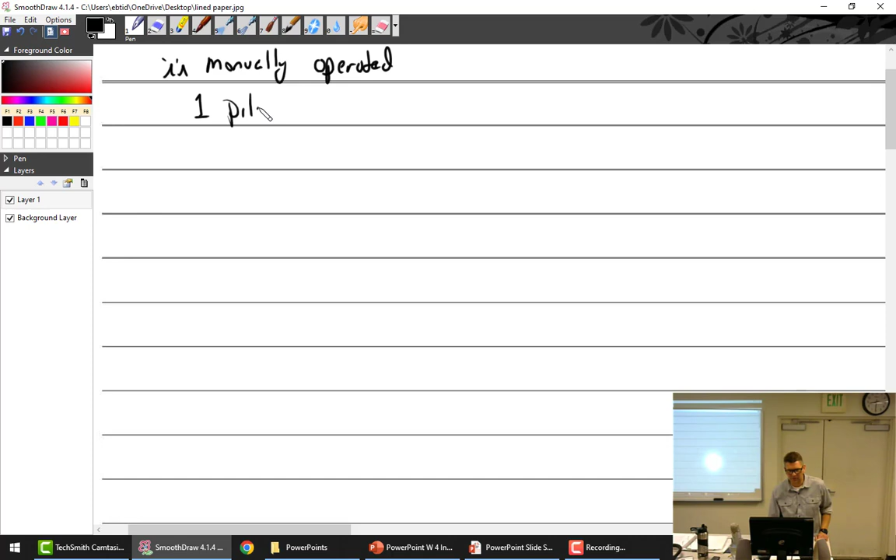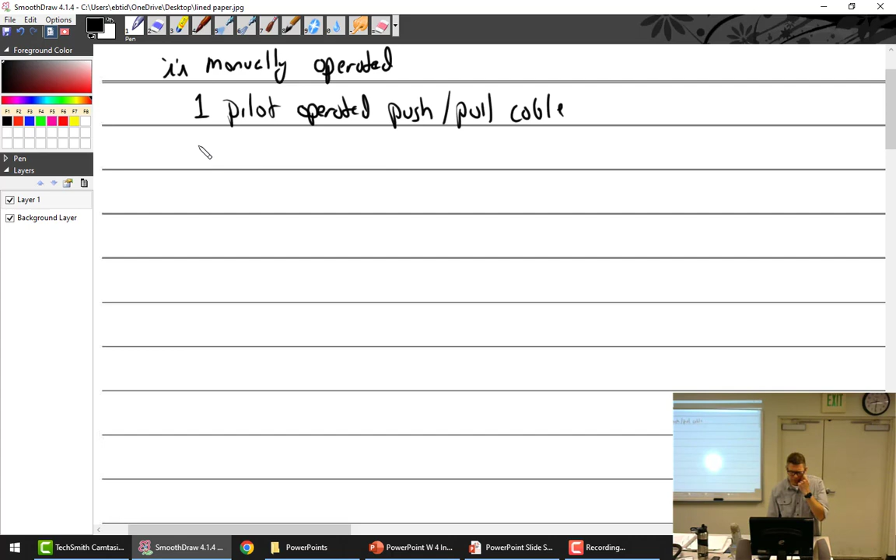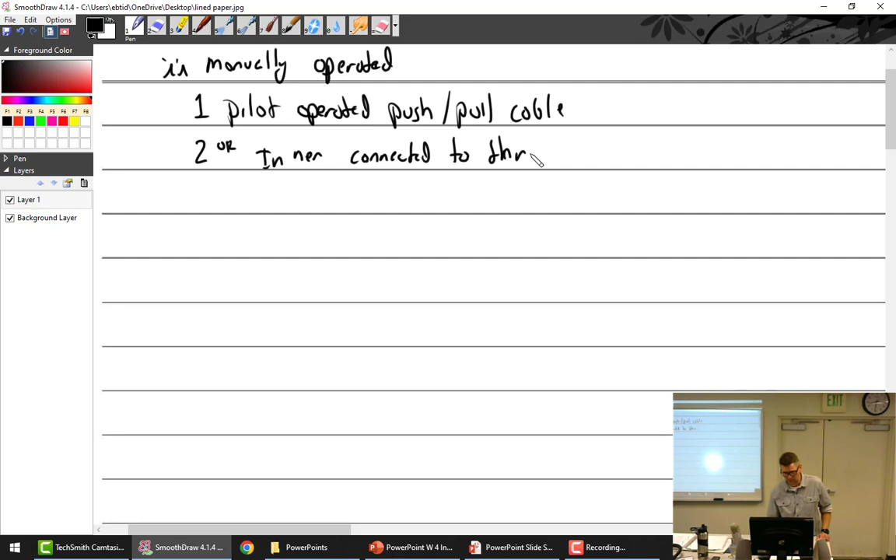All right, if we have a manually operated one, that would be operated with the pilot-operated push-pull cable. Or, I should say, interconnected to the throttle. So when you move the throttle, you move the wastegate at the same time, one lever.

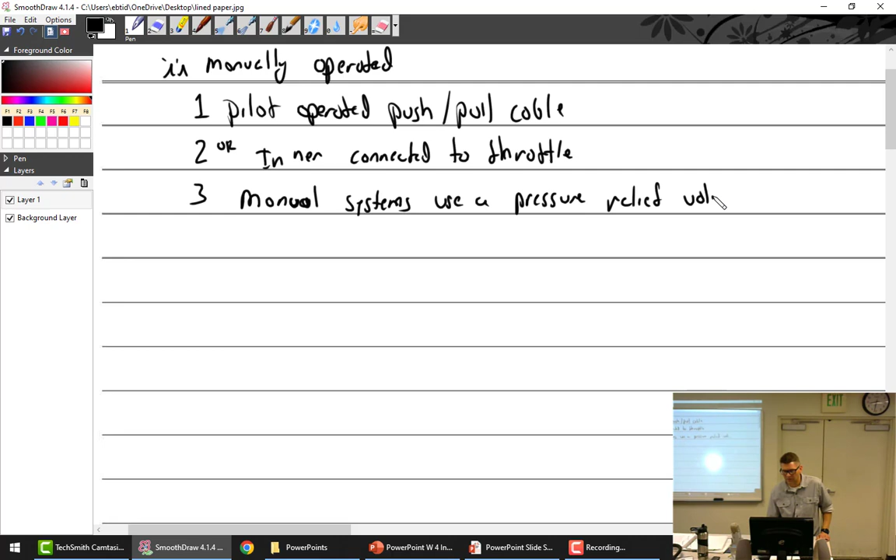So, yeah, I'll show you a picture. Manual systems use a pressure relief valve in the upper deck.

You have a turbo on your car? Who has got the turbo? Your Prius doesn't have one? Not anymore, not anymore, you're talking about 2005? No, it doesn't. Freeway grade, towards the center. Oh yeah, never again. Really, I would have thought the electric motor would have really... It's not that strong. I had that thing floored and I'm just crawling along, and everybody else behind me is pissed off, trying to get past this big old Prius driver. I had to give her a few breaks going up that thing.

Okay, the reason why I'm asking this... Oh, if you offer. Where do you live again? Somebody said you live in Tracy. If you offer, oh, so you are by me. Yeah, I'm south of you. He's like, hey, you want some? So you're way down the freeway by the time I leave here.

Anyway, the reason why I was asking that, you have pop-off valves on your cars? Blow-off valves, yeah, blow off. Do you hear them at all? Some of the nicer ones, yeah. It's more aftermarket ones. The soft ones don't give you that. Oh yeah, okay, yeah, all the aftermarket ones are really nice though.

Some of the EcoBoost Mustangs, some of the EcoBoost, I drove a car, it was so loud I thought I blew the thing up. Yeah, it was loud. It was a Ferrari California.

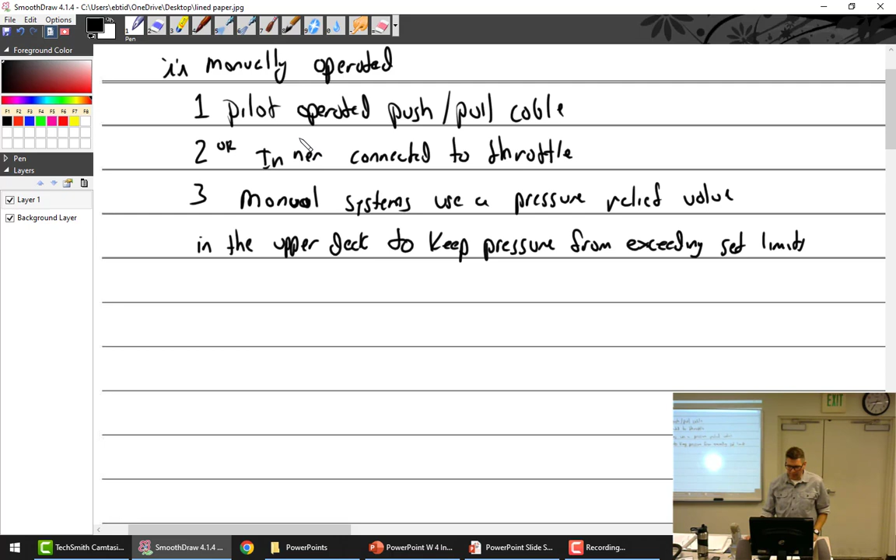Does it not use the wastegate because that would be too slow? Okay, so right now we're talking about the manually operated system. In the manually operating system, you're not going to have independent controllers to override and adjust the wastegate, so you are doing it on your own, so to speak. So either we have this manually controlled system.

So if we look at this, it's a very simplistic system, but we've already talked about it. Compressor comes in, so we've got this upper deck pressure right here with this pressure relief valve, which is normally going to be closed.

And then it's going to come through here, but we have the manual wastegate. I don't know what this is floating around over here for, but let's just imagine that that's controlled by a pilot push-pull control in the cockpit.

So my scenario where I was talking about, the pilot adjusted the upper deck pressure to the max manifold, takes his feet off the brakes, and we start rolling down the runway. Well, let's just say that maybe he didn't do that procedure, and he just kind of set it where he thought he wanted it, and then firewalled it, and we take off, and that thing just goes to overboost.

Well, it will probably overboost for a short period of time, but then this pressure relief is going to pop off and relieve that pressure, kind of like we could call it an idiot pressure relief valve if we wanted to. So it's like an idiot light, or what's the word I'm looking for? But anyway, it keeps you from blowing up the engine because you exceeded it.

But under normal circumstances, you're expected to be running the manual wastegate. But should you screw up, you've got at least one fail-safe right here.

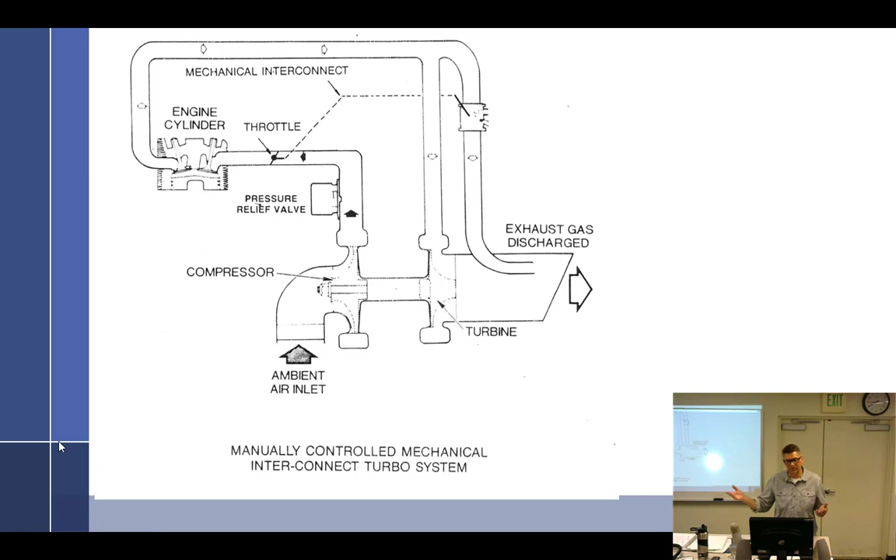Like overspeed? Yep, exactly. What was it? Overspeed? Like overspeed. Oh. So you're going to look at how far you overboosted it, for how long, what you're going to do, and so it can get really, really pricey. I like a hot start. Yeah, all right.

Manually, or oil controlled, or automatic, I could guess.

Oil controlled. One uses a piston operated wastegate.

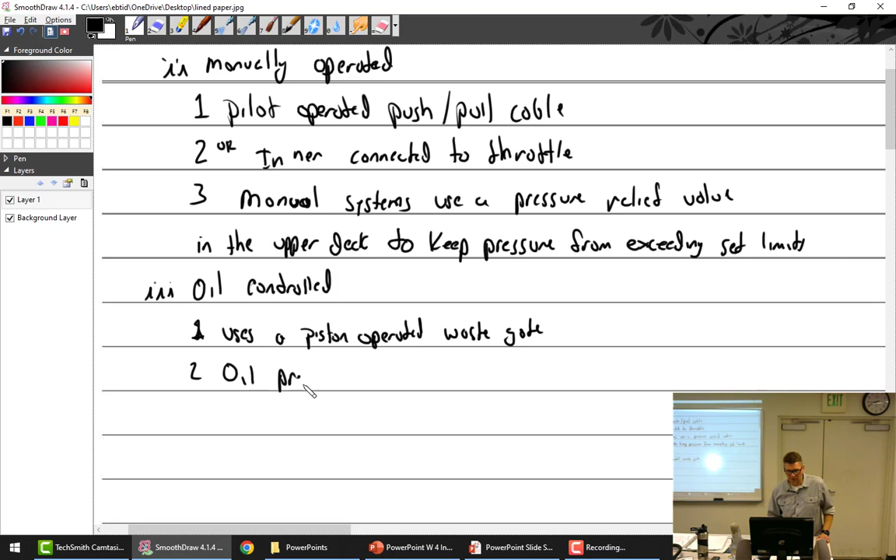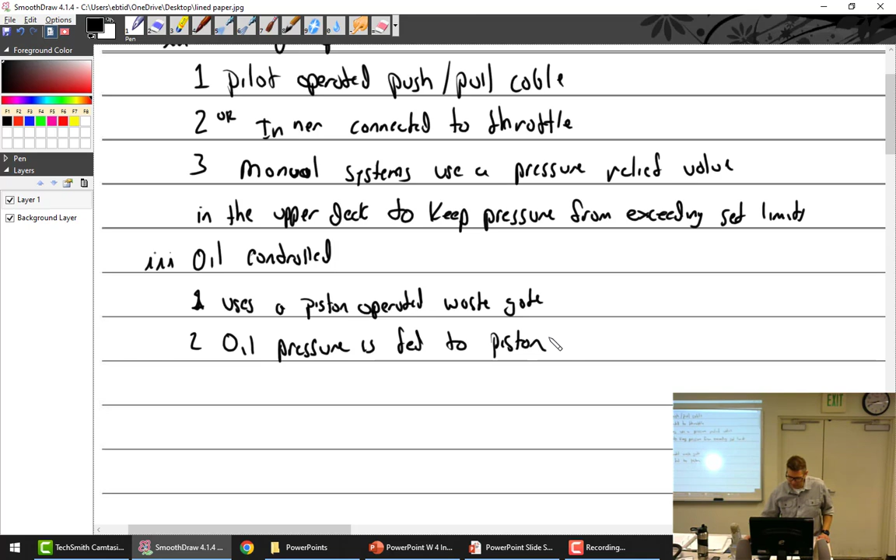Oil pressure is fed to piston at all times. That'll make more sense in a little bit.

So it's not like you turn the oil on, you turn it off. We're going to have a constant supply of oil. We're going to control that constant supply of oil. As pressure builds, wastegate closes. As oil pressure builds, wastegate closes.

And that is turbo on. Like a switch. When it's closed, it's on. So as wastegate closes, the exhaust does not get wasted. It goes up to the turbo, turbo comes on.

Just to keep our minds flowing here, when I'm sitting there on the ground with the engine off, what position would the wastegate have to be? Open. So as I start up the engine, I've got to build up oil pressure to go through, start pushing on the piston. It's going to start closing.

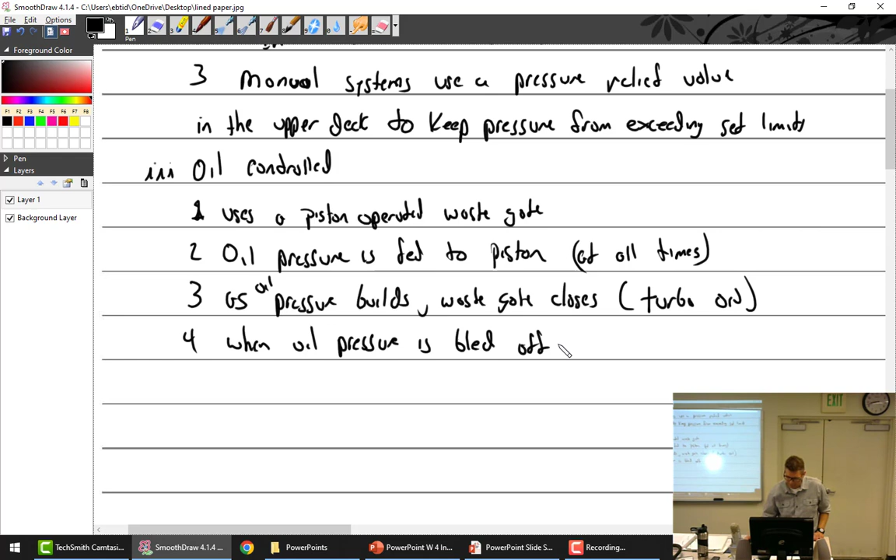So it's going to take a little while. When oil pressure is bled off, wastegate opens. Which is turbo off.

The position of the wastegate is variable. Meaning it's not binary, not open or closed. It's like a throttle. And you're like, what's a throttle?

Wait, did we talk about throttles? It's like a throttle, the thing in the back of your throat. Yeah, it's a thing. Throttle.

That's exactly it. All right, wastegate. Wastegate is never fully closed or fully opened.

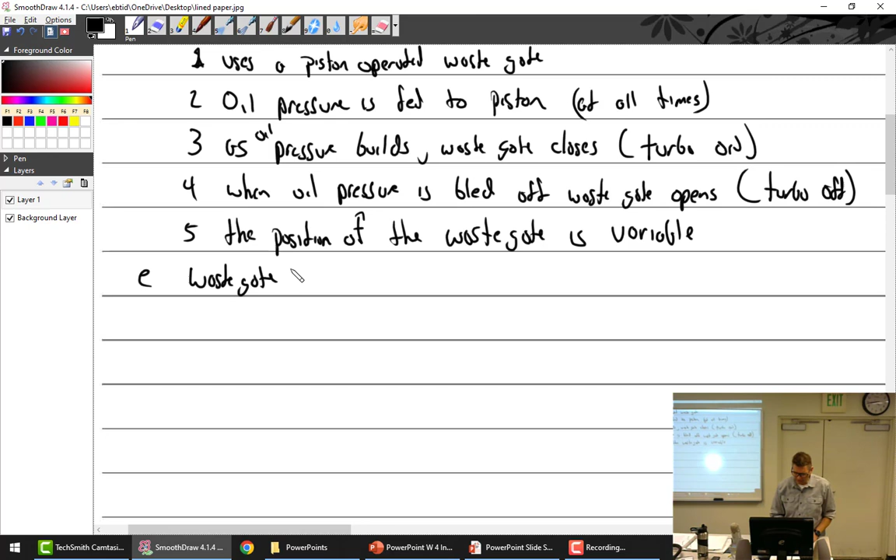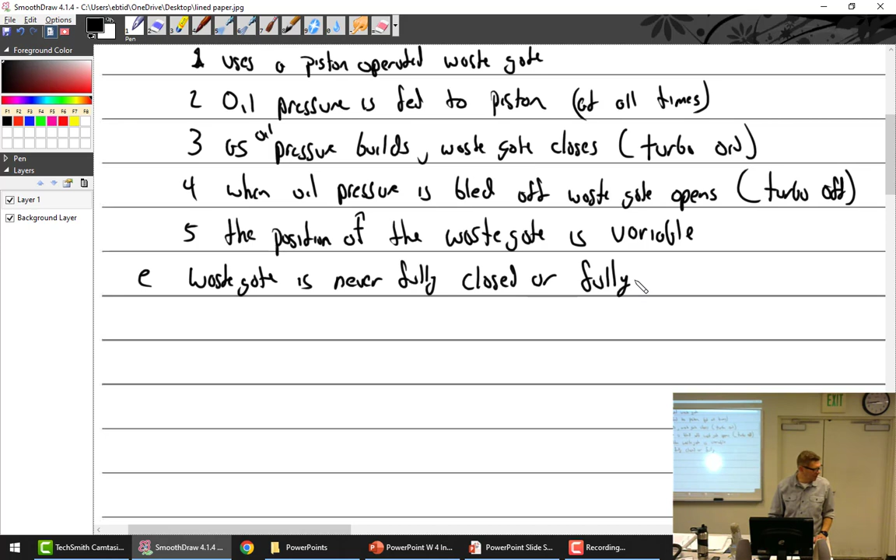Wow, you went through the whole notebook? Yeah. Wow. Never fully closed or fully open.

If it is fully closed, fully closed is turbo on or off. Okay, it could coke. Right? What is coking? Good time.

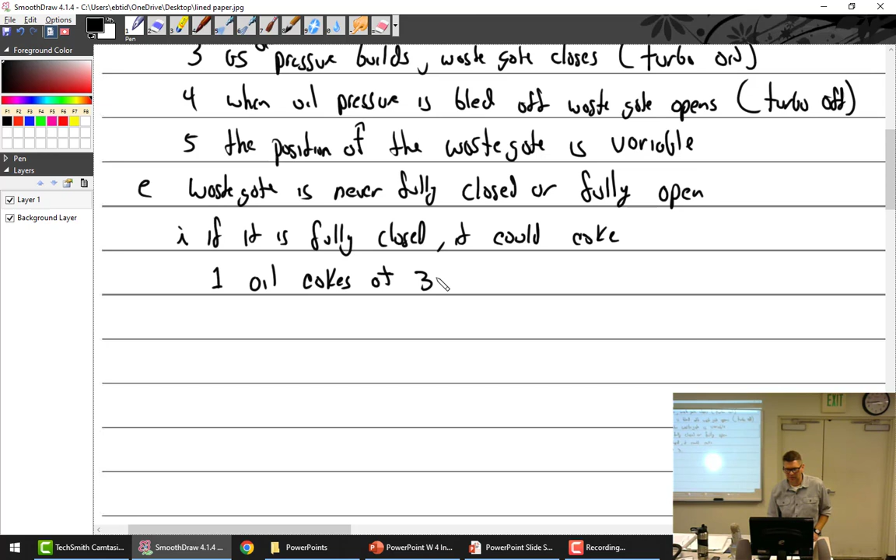Depends on the state you're in. At 300 degrees C or 575 F. Remember what oil coking is? Okay, it's when it turns into that hard crystal stuff.

So yes, we're talking a lot of heat around here. So we don't want that to do that. Would that be buildup or corrosion? Buildup. And then it can start blocking passages.

Let me see. Okay, this is why cool down is important. This is why cool down. Jeez, the coke is at 575 and the exhaust is what?

15, 1600. Can't let it sit there. So the oil can't get that hot, cool down. But if you keep it moving, it's only there for a brief moment of time and it won't get that hot.

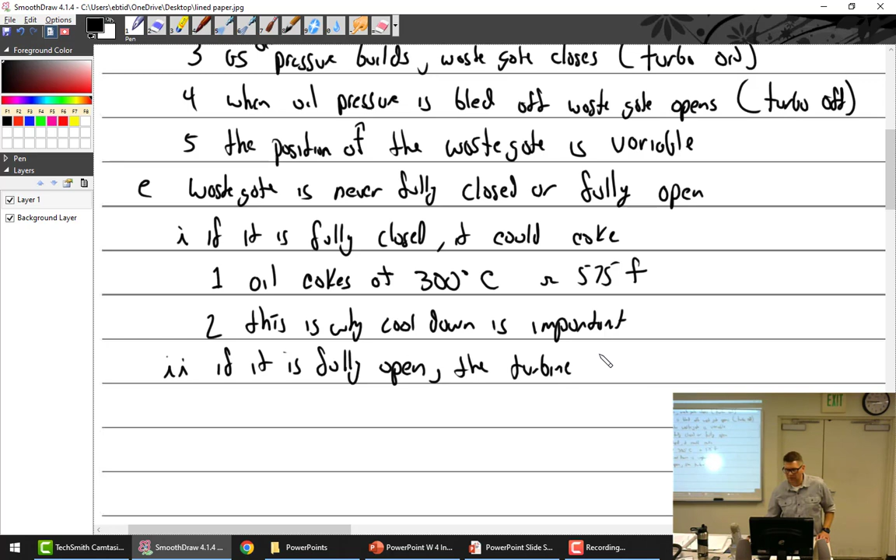If it is fully open, the turbine doesn't turn. I imagine it actually would turn. They say that, but you have incoming ram air that's going to hit against the turbine wheel, which should spin it and keep it going.

But yeah, this is what they say here. So fully open, turbine does not turn and is unevenly heated, causing stresses and cracks.

All right, so there's your three systems. Let's get into detail. Well, I pretty much already did detail on the fixed, so we can just move right across that. You gonna be all right?

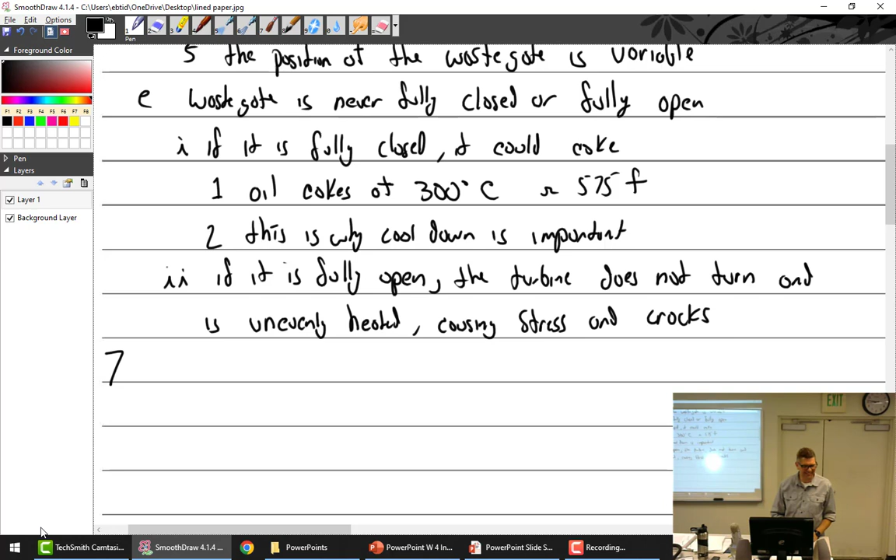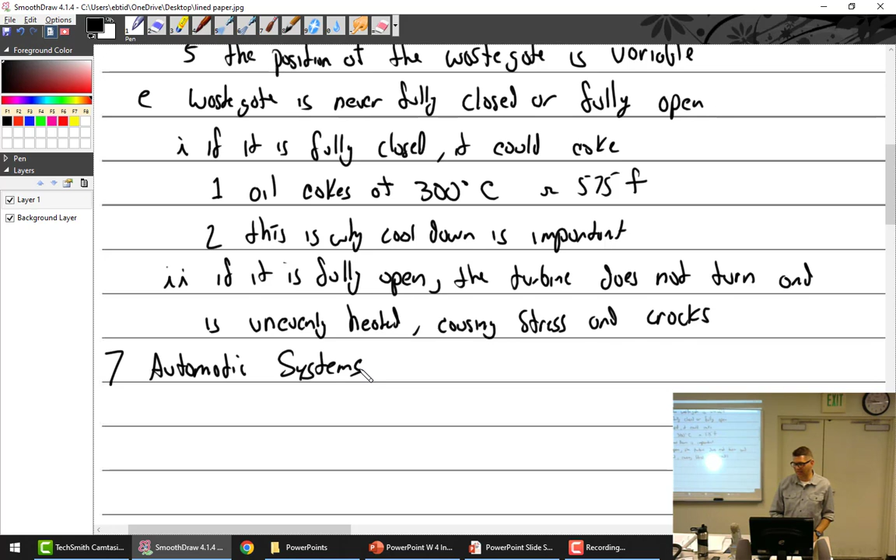Yeah. Big yawn, I'm very tired today. Should I make it more interesting? No. Yes. You're doing just great. Well, I just get stuff and throw it at you, that's all. Yeah, where's the wrench, the bag of Skittles?

Keep forgetting them. All right, automatic systems. Wouldn't it be nice if there was just one automatic system? But nope, there's different. Let's talk about Lycoming systems first.

And there are many. And then we have to talk about Continental. And there are many. So settle in. I don't want to. All right. You have to. So, no, you don't.

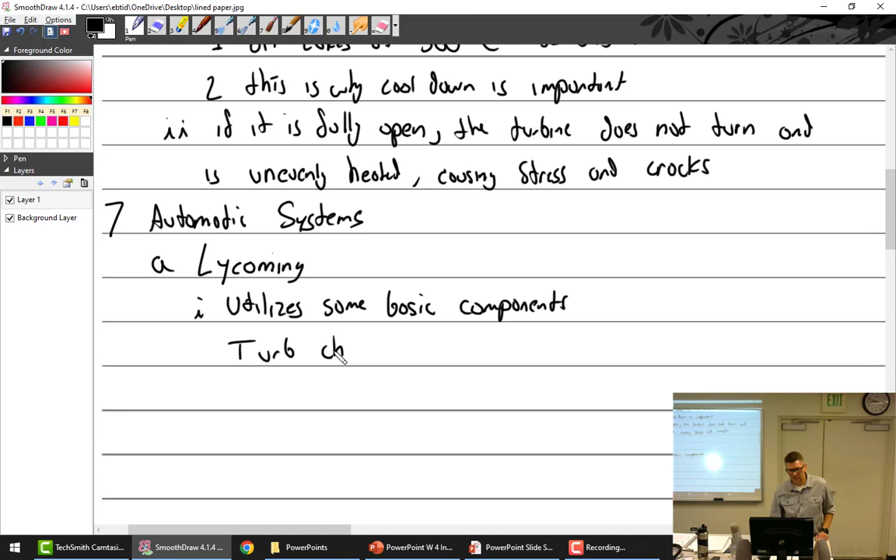All right, obviously we're going to use the same basic components through all of these. So it uses the same basic components. And the basic components would be the turbocharger, the wastegate, and then let's see, turbocharger 1, 2, 3, and then it will use one of three systems.

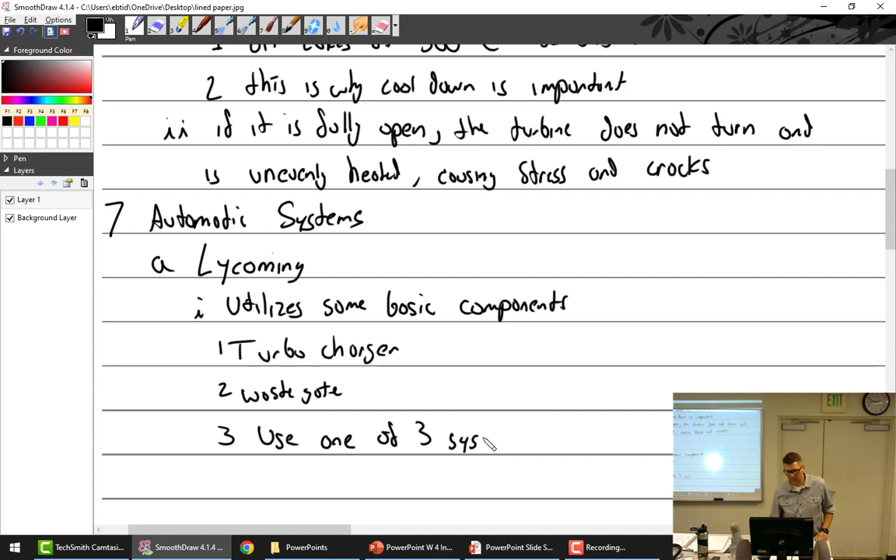Now, full disclosure here, this is going to get slightly confusing, as in wait a minute, is that like system 1, 2, and 3? But now you're talking about this, but that doesn't match 1, 2, and 3. There's no way I've seen all of the engines out there, and even Lycoming themselves with their turbo publications, when you read through it, it doesn't really differentiate well between, oh, this is that system, this is this. And the reason why it gets that way is because you have basic systems, and then you have airframe manufacturers who can customize it.

And go, oh, we like system 1, but we want that controller, right? And they can do that.

You can actually find airplanes that don't match types 1, 2, or 3 exactly - they're kind of a hybrid of different stuff, because that's what the airframe manufacturer asked of Lycoming. So you can run into different configurations.

But the idea is if you can identify at least the basics of how it works and what each controller is, then it gives you the opportunity to start troubleshooting. If it does this, then that should be that controller, or if it does this, that's more likely that controller. Because if you don't understand these systems, what people do, like any system, is just start throwing parts at it.

I remember one time I was working on a turbocharged, was it a Baron? I love those planes - yeah, P Baron, turbocharged, pressurized, sweet airplane. The guy was flying along at some high altitude and heard somewhat of an explosion, and the cabin pressure just fell off. So he had to do his descent and stuff like that. Brings it into the shop - I got this, every single person...

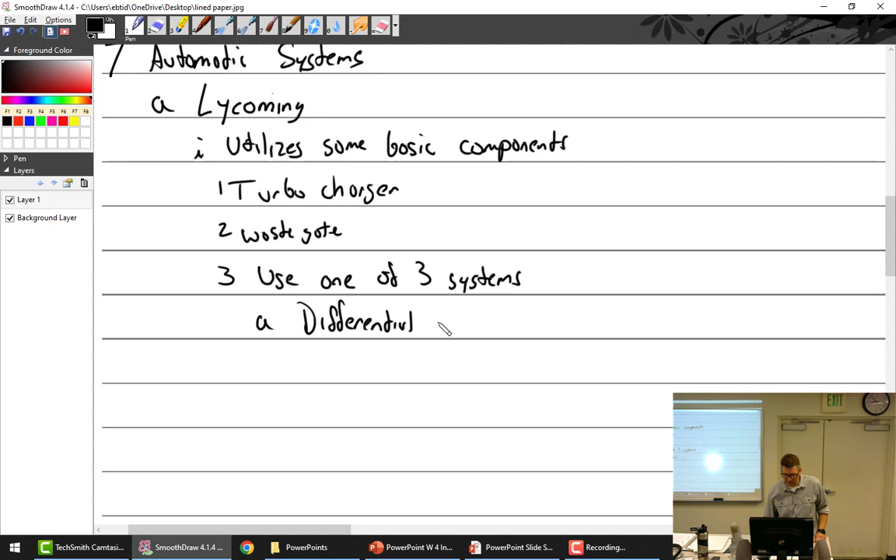All right, three types of controllers: the differential and density. Differential pressure control - we'll talk about what each one of these are. And density control. B, the variable pressure control.

And the slope controller.

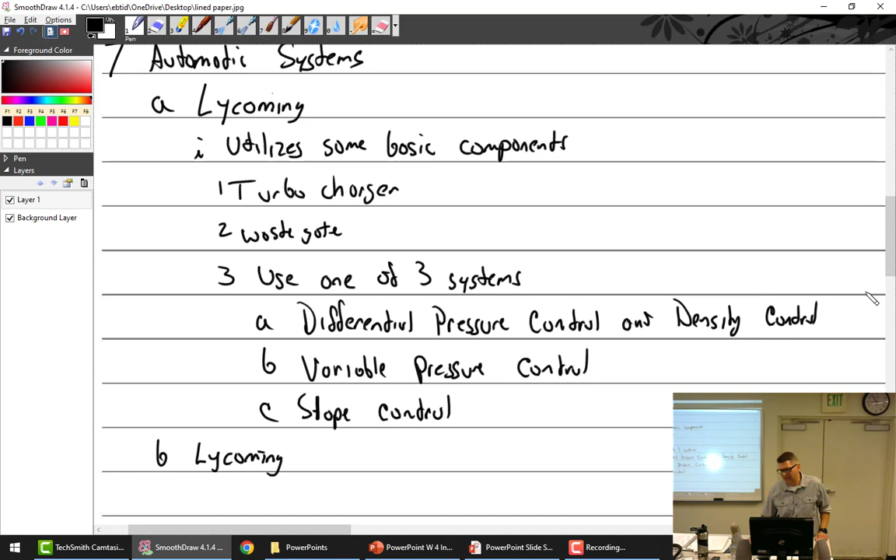We'll start by talking about the Lycoming. Honestly, they're simple little things. They really are. You guys are going to be able to look at it and almost figure out how it works just by the pictures. Lycoming differential density system.

This is used on the TIO 540 Alpha 2 Alpha, used on the Piper Navajo. Used on TIO. What's TIO? Turbo injected opposed. 540 Alpha 2 Alpha on the Piper Navajo.

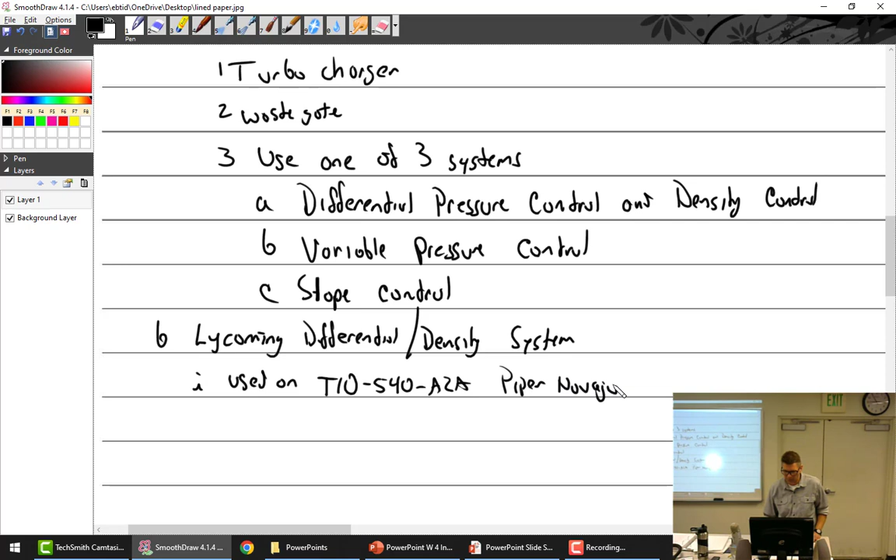Piper Navajo. It is, because this is interesting, sea level boosted by 10 inches. So what am I going up to for manifold pressure? 40.

Is this turbo normalized or turbo boosted? It has a critical altitude of 19,000 feet, if it's working correctly. What does that mean? That's where it drops below, where you see above sea level. It starts dropping off at 19,000.

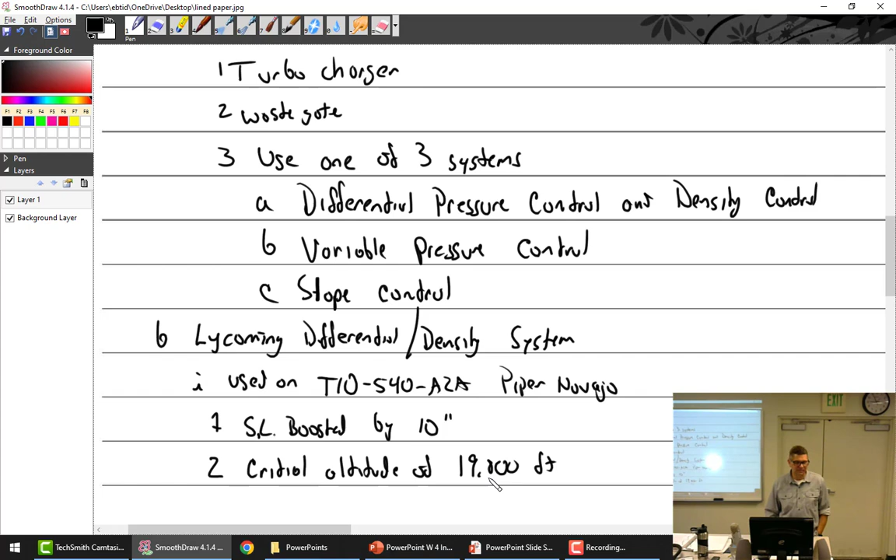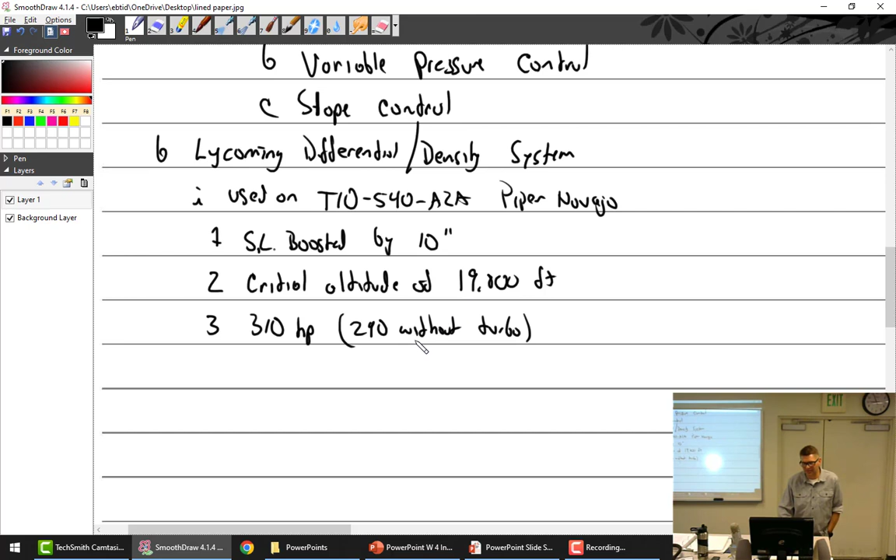310 horsepower. I have 290 without turbo, which doesn't sound like a lot, but you have to remember that's at sea level. So you don't have a whole lot more power at sea level, but you're going to carry that 310 horsepower all the way up to 19,000. Not quite, because you have hot air and stuff, but for the most part, yeah, 300 horsepower.

Is that a 2A or a ZA? Alpha 2 Alpha. They don't do Alpha Z Alpha. That's just ridiculous. Remember, you gotta do the line. That would be it. No, that'd be a Z. Oh yeah, that's right. That would be a... that's all. Wow, my grandma's never done it that way.

All right, done that one. We've done that one. Lycoming density differential control system. I have this big slide, which means that if you're looking at it online, you can't see it all, but you're not missing much. All right, so let's dissect this a little bit here.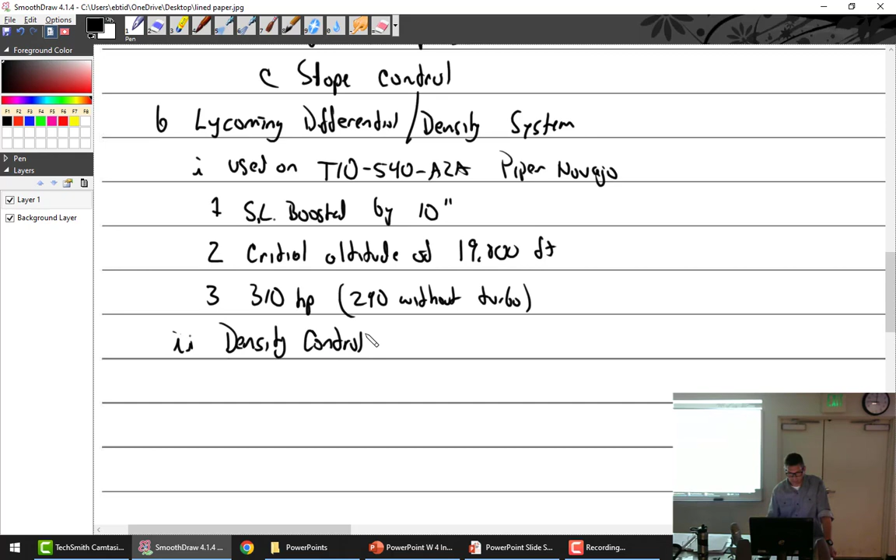This can be one of those things we just build on a little bit. They just change things slightly, but for the most part, that's what you're looking at.

Density controller. It's designed to sense the density of air. Let me go back to the picture, maybe that'll help. Density controller right here, designed to sense density of air after it passes the compressor, before the throttle.

So that's deck or upper deck pressure. I always say upper deck. Some people do say deck.

So its job is to provide the quantity of air necessary for full power operation. As long as you're getting full power operation, it's happy, it's open. It's only designed to meter during full power operation.

So once we get—and the reason I can say that is, if I'm at idle, where do you think this is going to be, open or closed? Closed. Yeah, we need more. As closed as it can get.

Like I said, this is off the Navajo. If I want 40 inches here, and I'm idling at 18 inches or something, it's got to have more. Closed. It's ordering more. I want more turbo.

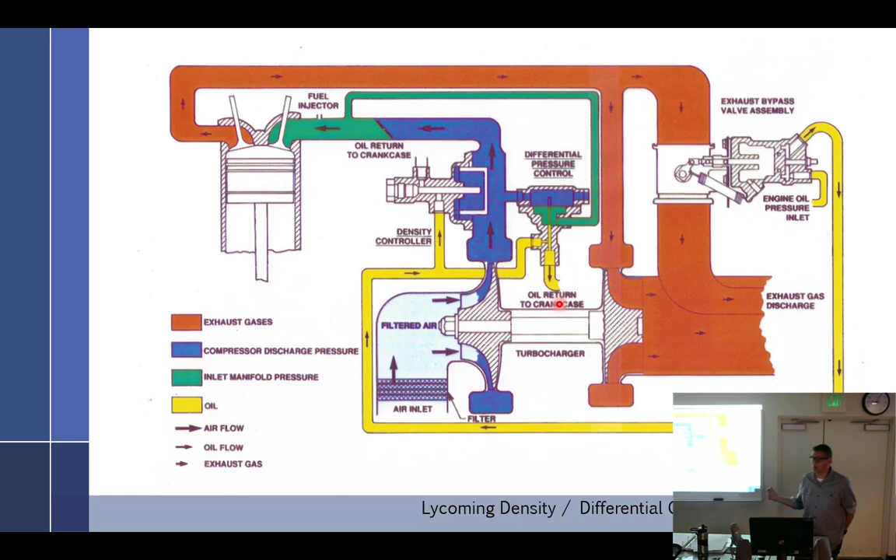Close this off too much, and then everything shuts down, then this starts spooling down a little bit over here, and then you're undershot—so you're going to keep this hunting going for infinity.

Did they have, like you had on, or have on your mixture control, the vernier scales?

This is an automatic system. Oh, it's saying for the throttle? Of course. But a lot of planes have quadrants, and they don't have these. So you're kind of hunting, and they have two of them, so you've got a lot going on there. A vernier wouldn't really help. You go back and forth, back and forth.

That's where the differential pressure controller can really help. Because while this one's over here just saying more power, this one over here is going, now wait a minute, let's be reasonable about this. You're over here with your manifold pressure, only asking for 18 inches. Well, why should I give you 40 inches over here? If you only want 18, how about I just give you 20 on the other side? Is that enough? It's negotiating, right?

Sorry, I just watched a clip that came up when I was doing something earlier. It was My Cousin Vinny. You guys know I love that movie. Yeah, because he's an attorney. The guy was going to kick his ass. He goes, I need my $200. He says, how about I kick your ass? That's a counter offer. That's what we call in my business a counter offer.

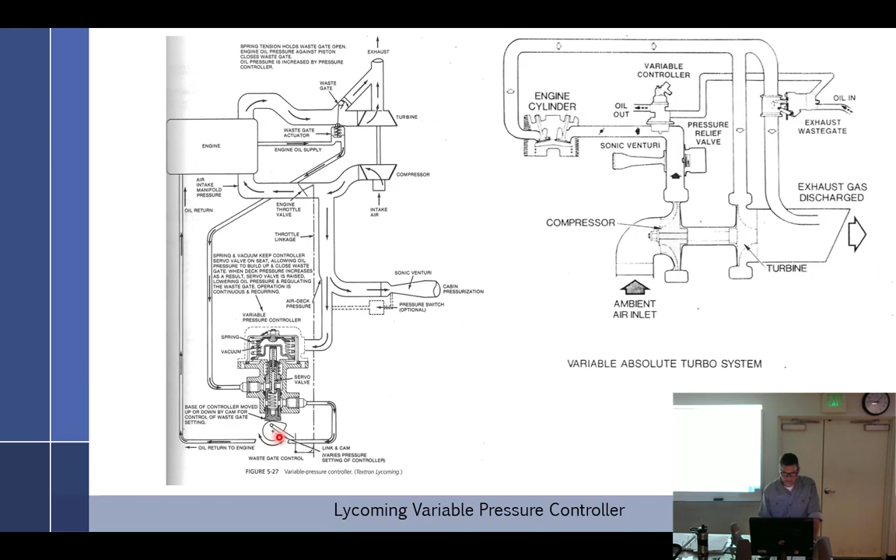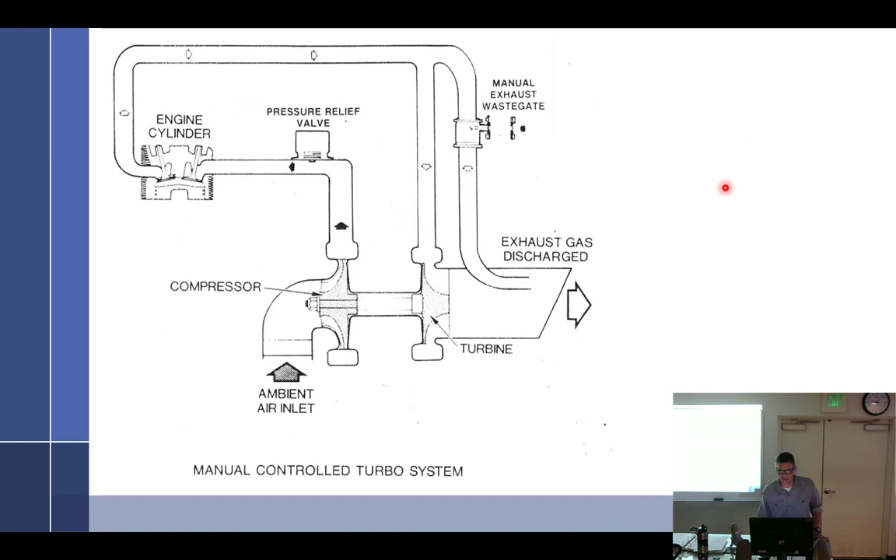Is there a spring in that piston that is keeping it off when the oil pressure is not pushing? In the wastegate, yeah, it's right here. There you go, right there. So one spring going one way, one spring going the other. There's a spring right there. All right, got that?

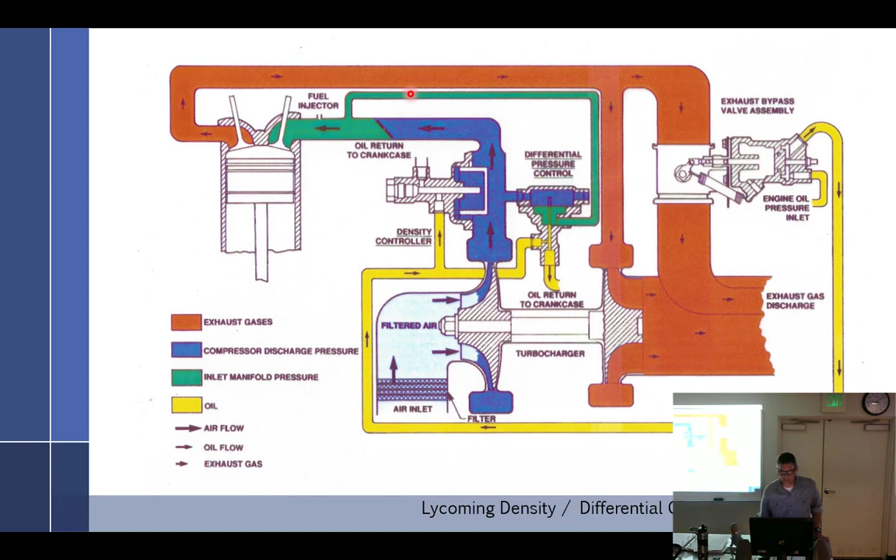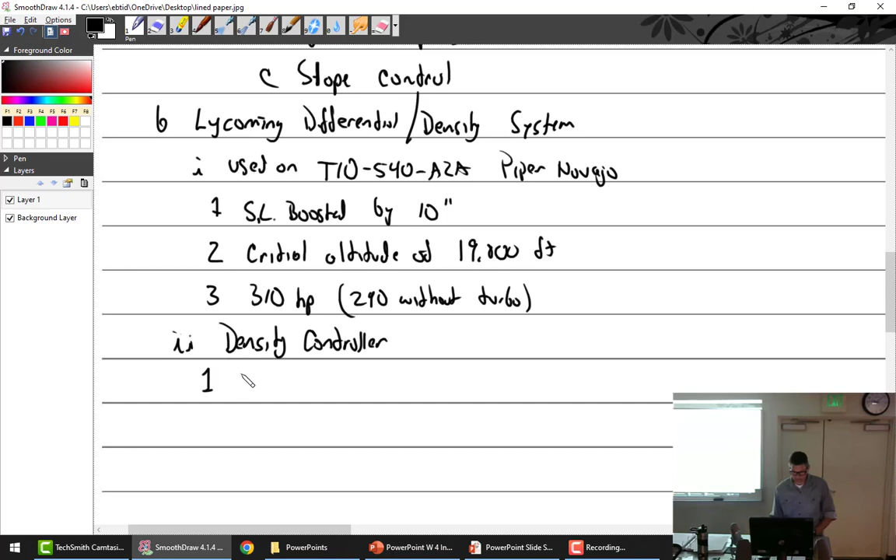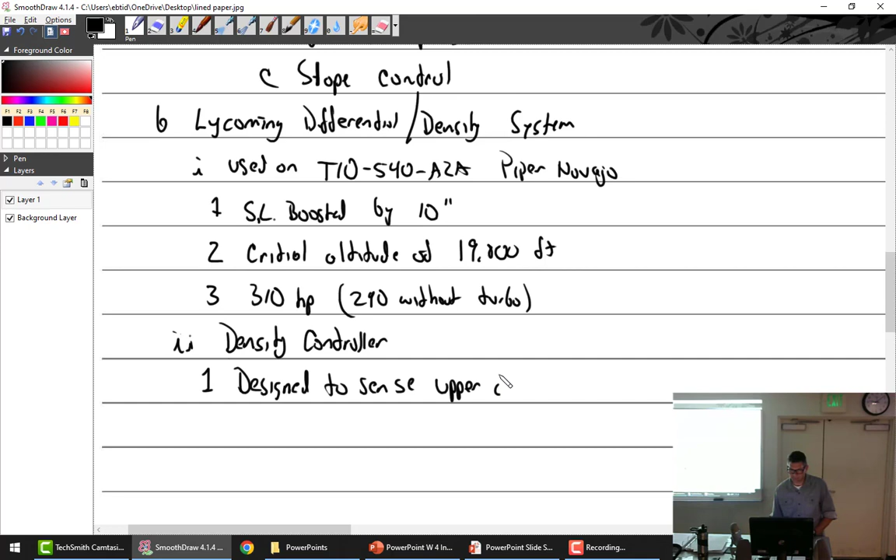Let's write about it. Density controller: designed to sense density of air after it passes the compressor, before the throttle. We could abbreviate that - designed to sense upper deck pressure. Like I said, I forgot until I looked at my notes - I think Lycoming just says deck pressure, because really there's no lower deck. But it could be.

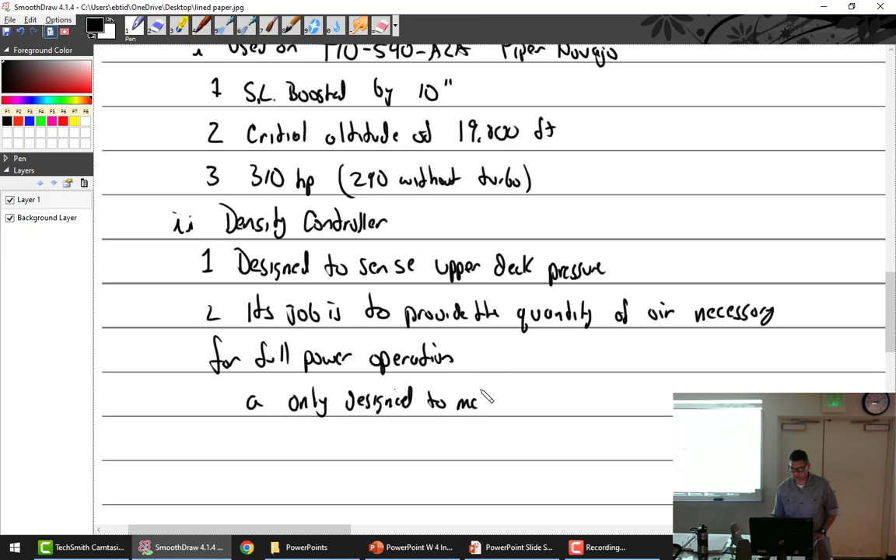Its job is to provide the quantity of air necessary for full power operation. It is only designed to meter during full power operation. Like I said, the reason why I say that is because its job is to give you full power - 40 inches, in this case. So it's only going to meter all the way up at full power. Otherwise, it's just not going to get a chance to do its job, it just stays closed.

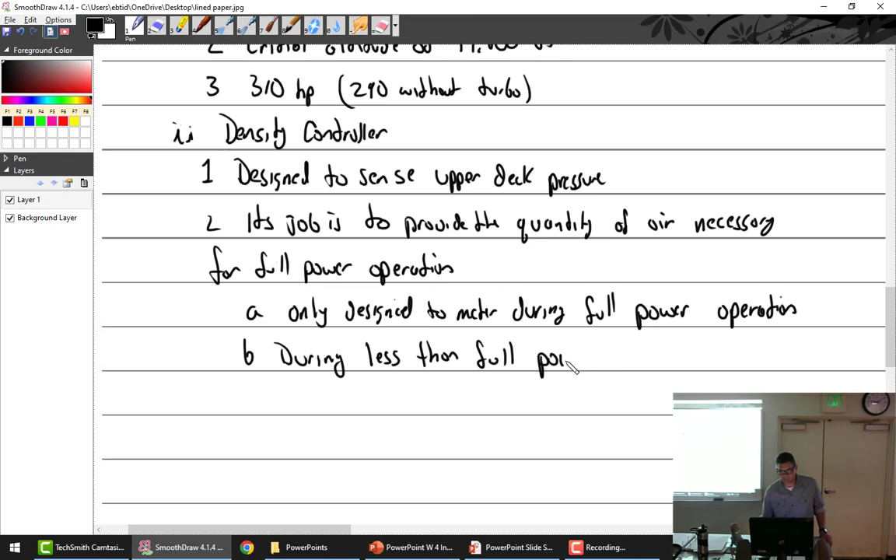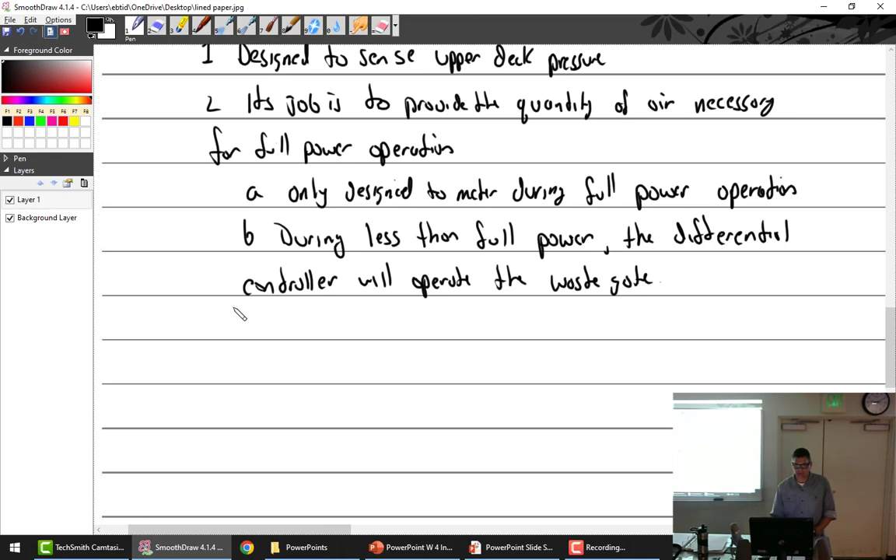Because of this one, during less than full power, the differential controller will operate the wastegate. Density controller is measured by two items - controller, I should say, measures two items.

What do you suppose those two items are? The density controller measures density. It's not a deck differential or oil pressure - it does not measure oil pressure, doesn't care. It's the upper deck. What is it measuring in the upper deck?

Air. Air pressure and air density - that's what it's measuring. Well, how would it measure density? By how much is coming in. It doesn't really have impact tubes or venturi or anything like that.

What are the two things that make up density? Mass and volume. Okay, so...

As a pilot, I decided I'm going to bring my airplane over here and stop in on Saturday and give some rides, right? Were you guys here when I did that? No, we were here and then Larry kicked us out. So I come and it's kind of a hot day. Do I have some concerns about putting a bunch of fat people in the airplane? Yeah, what are my concerns?

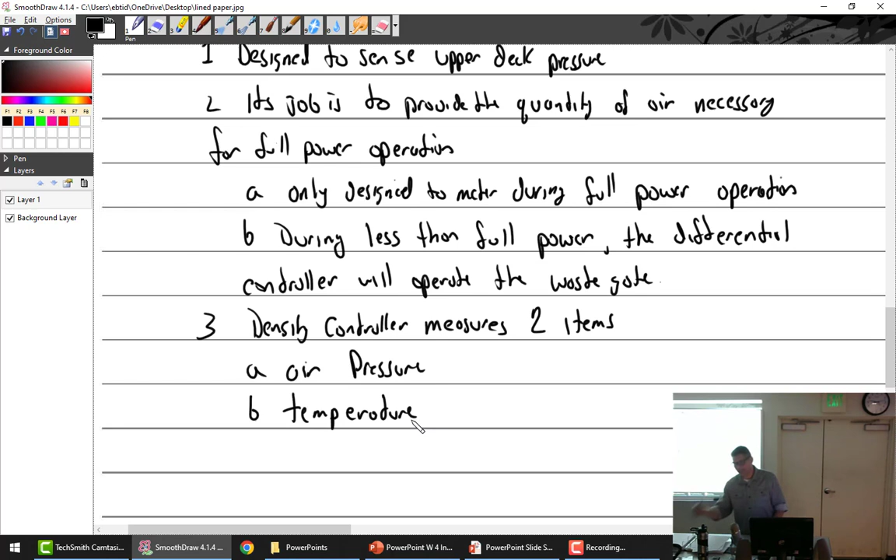So what do you suppose is another function of temperature? That's what I just said. Yeah, I know, just now. Like you said, yeah. But he did say it. Even though you said it like 5 minutes ago.

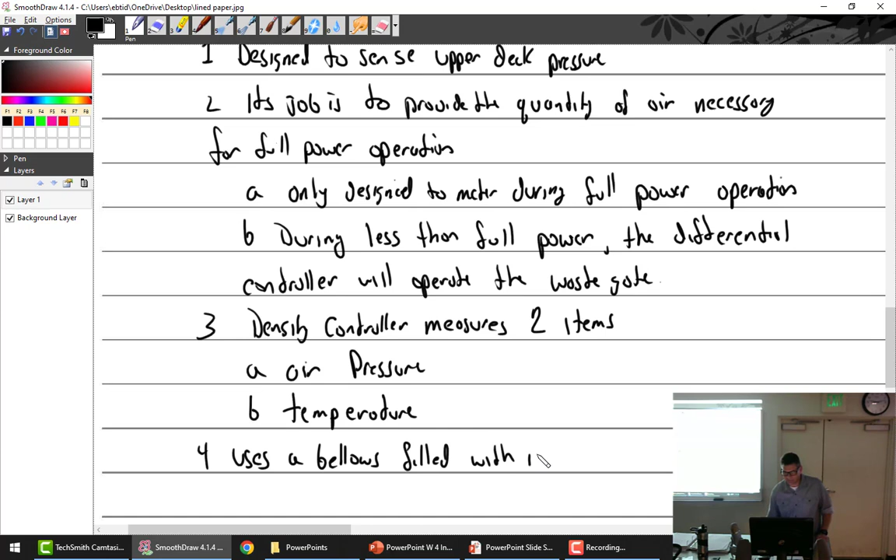All right, temperature. It uses a bellows filled with nitrogen that is in the airstream. Do I need to write 'potato chip bag'? They should have used butane, right? Yeah, it's a little lighter fluid.

Do they use nitrogen in the bellows on all the pressure carbs, or is that just air? No, I believe it's nitrogen. I think some use helium - not totally sure, but we'll go with nitrogen. They weigh less? Yeah, that makes the whole carburetor lighter.

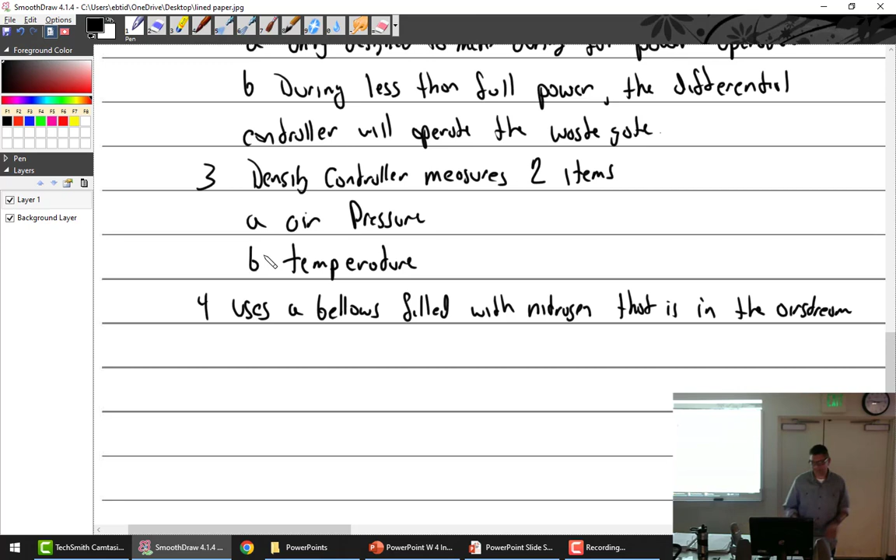It's in the airstream. There we go. Lost my place - nope, that was it. Okay.

Movement of the bellows will either bleed off oil from the wastegate or block it. So if it blocks the oil, that would be wastegate closed - turbo on. If it bleeds off, the wastegate will be open, which would be turbo off.

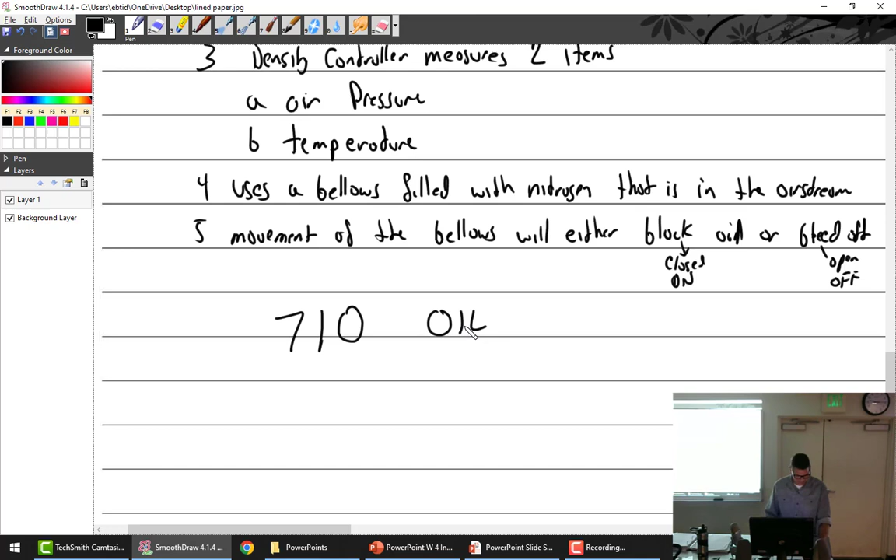You guys have seen the picture about the person looking for the 710 to put in there, like the 710 to add to your car - if I turn it around it would look like that. I need more 710. I'm surprised I didn't - what did I miss? I was here yesterday. That's all right, just talking, sorry, so you can finish writing this and catch up to me.

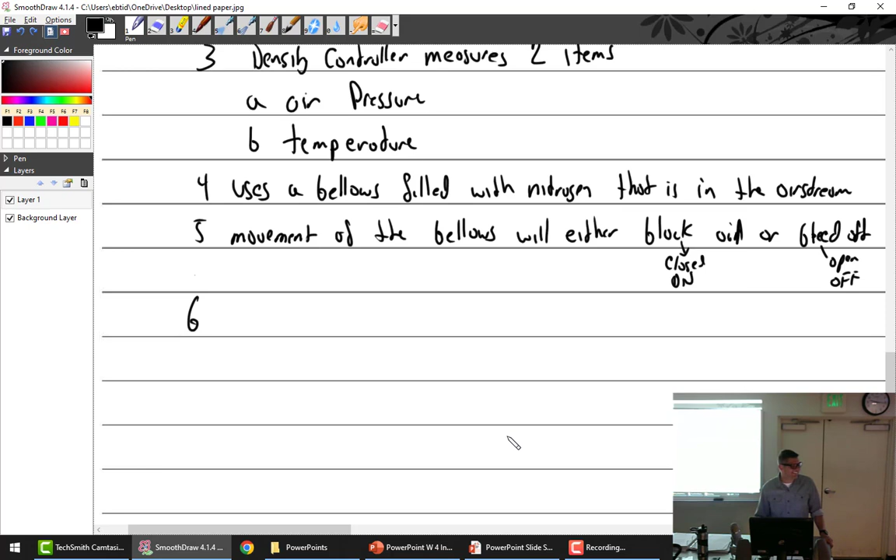I told you about needing oxygen for my airplane, went to the dive shop. I actually asked if they had any NO oil in stock. The guy's like, huh? I'm like yeah, he goes, we don't usually use oil on oxygen fittings. I go, it says right on there to use NO oil. He's like, huh? I'm like, right there it says, use - oh, no. So I need some NO oil. You must have found that really funny. Did you really do that? Yeah, sense of humor is like, oh, huh? I'm like, it's a joke, don't worry about it, it's not a thing.

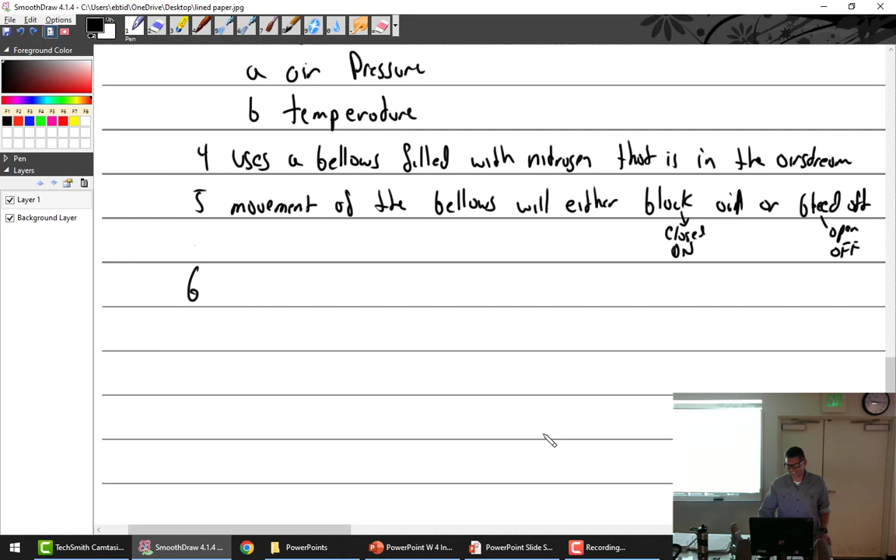So you were able to fill your oxygen tanks for your airplane at a scuba shop. Yes, for very low cost. That's awesome - they've got to have their stuff certified as well since you're dealing with different requirements. I used to scuba dive a long time ago, when I was 16 I got my license, and things have changed so much. I told him that - I haven't dove since basically I got into the Navy. I'm like, well, why would you have oxygen? He's like, oh, I'm so glad you asked, and he went into all their mixes and how they're doing stuff now. Thought it was pretty cool, insane what they do.

So as temp increases... it's time to go, huh? Yeah, that's a good place to finish. All right, well, it's a long point - as temp... okay, yeah, it's a long point, we'll do this tomorrow. As temp...